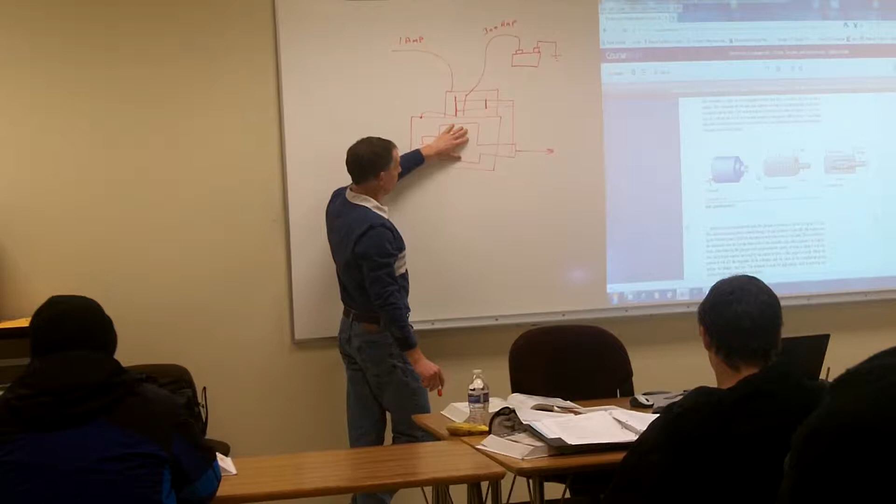So when I turn on my ignition, this thing might only take about 1 amp of current to engage that solenoid. Once that solenoid engages my starter, then I'm drawing close to 300 amps off my battery. It takes anywhere from 150 to 300 amps depending on the vehicle—that's about how much current it takes to start spinning that motor and turning your engine over.

Well, my ignition key can't handle 300 amps of current going through it. If I were to put my starter motor directly into my ignition key and tried turning that starter over directly without a solenoid or relay, I'd be drawing 300 amps through my ignition switch. Most likely I'd end up burning up the contacts in my ignition switch, or it would heat up awfully hot and burn out my switches.

So that's what we use our relays for—to switch very low current into very high current.

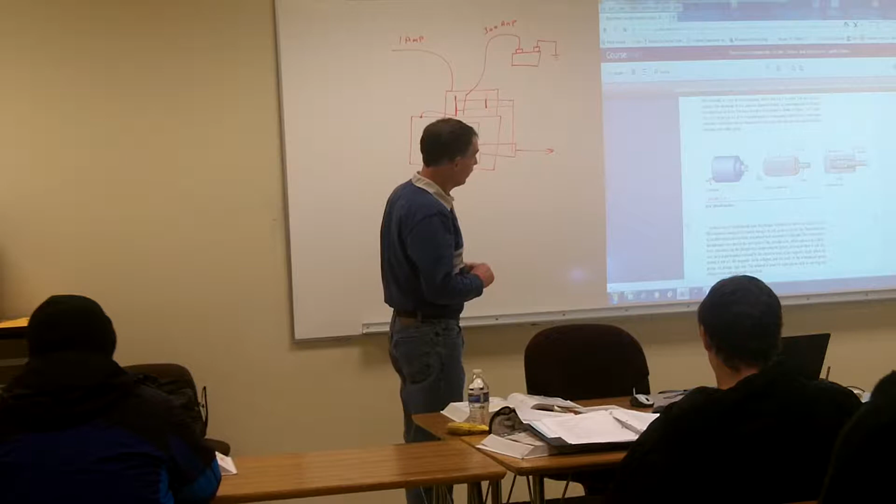And we're going to take a look at the lab here, that's lab 7—we're going to take a bit more of a look at the relay there. So those are a couple of devices we see all the time in our field. A lot of times we might just use this to engage some other type of device in our automation equipment, and relays we can use either to control things or use them as logic.

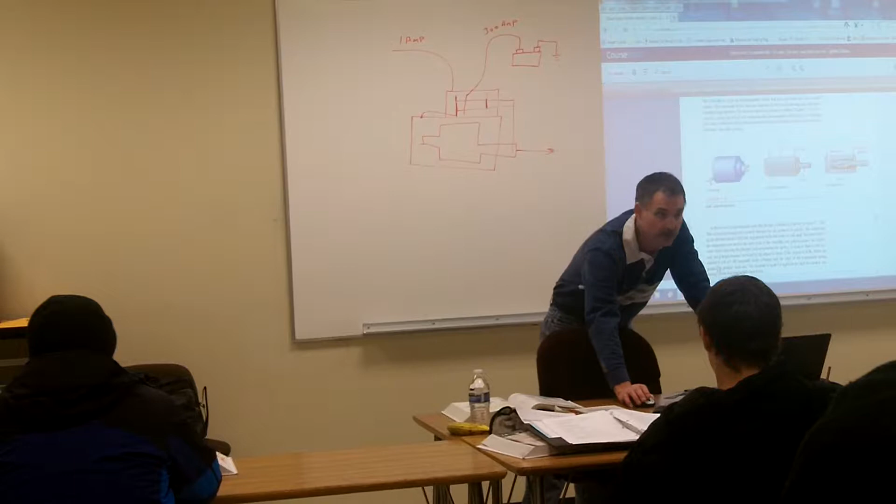So let's—does somebody happen to have their parts kit with them with their relay in there? I don't have that part number for that relay.

So let's take a look at the relay here. You have the number—12 volt DC, double pole. You know what they're looking for, you know what your relay looks like. This thing? Oh, this one here—here's your relay that came supplied with your kit there. So that's the one that if you have your parts kit, you can dig out.

And if you have your lab manual, we're going to take a look right at your lab, because that's a little tricky—there's a little circuit there. So you're going to go through the lab, and when you get to the further investigation, you have to design your own circuit on page 123 of your lab manual.

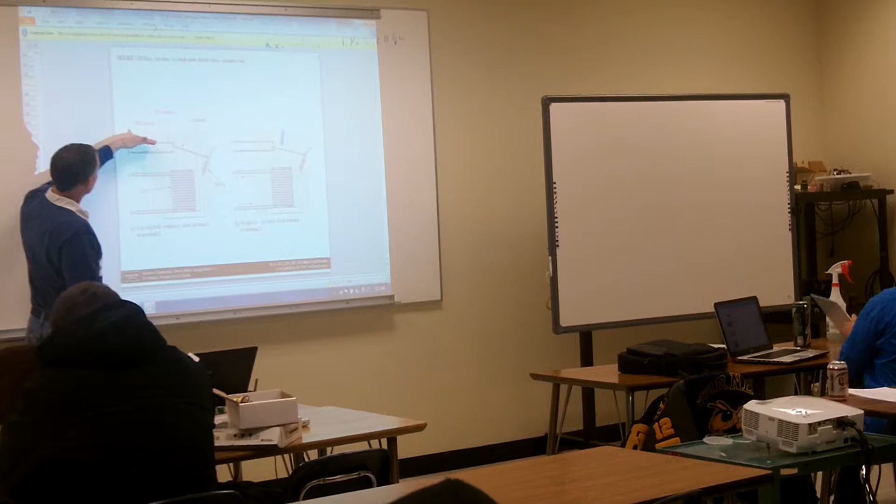So basically, this relay that you're looking at right here consists of a coil and then a switch. It has either a normally closed switch, which is the top one, and then the normally open contact.

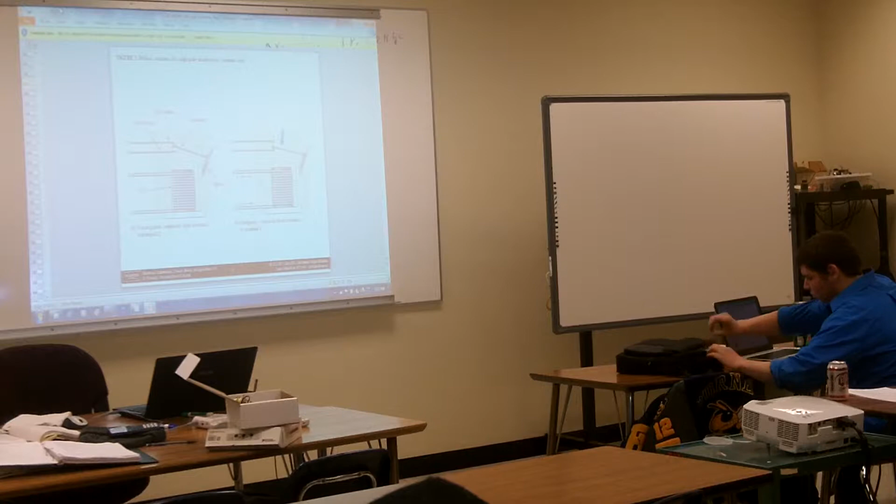Basically what it is, we're going to have our DC power supply. And typically when we're drawing up symbols for our relays in our schematics, we draw it up as just a circle. And a lot of times, from the old days, they're called CR1s, meaning it's represented as a control relay.

And we would number CR1, CR2, and go down the list for however many relays we had. So a lot of our equipment, way back prior to the early 80s, was all done with what's called relay logic—instead of PLCs, programmable logic controllers, or microcontrollers, all these solid-state devices, or even transistors, we used to use mechanical relays.

And then these would come out of our circuit boards or whatever, and then we could control our different devices. So this is the coil, this makes up my coil. And then what we would do is—I'll draw it a bit simpler—we might have another source, and we'll just say we're turning on a light bulb.

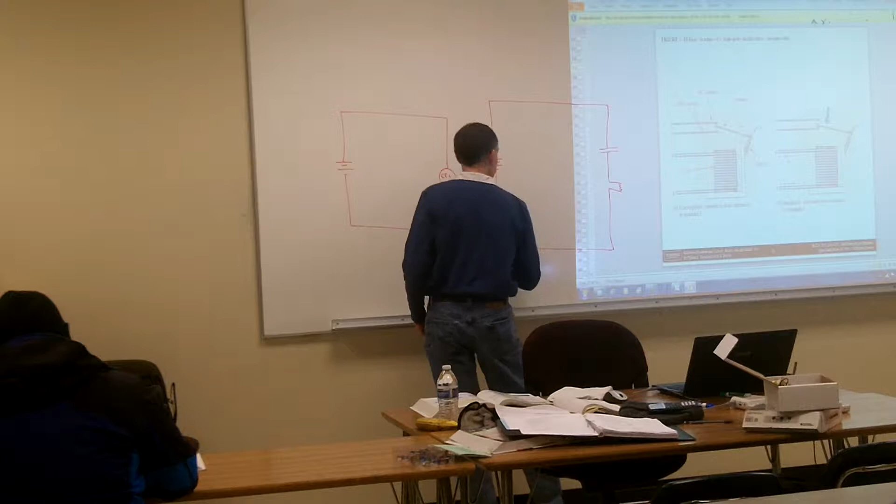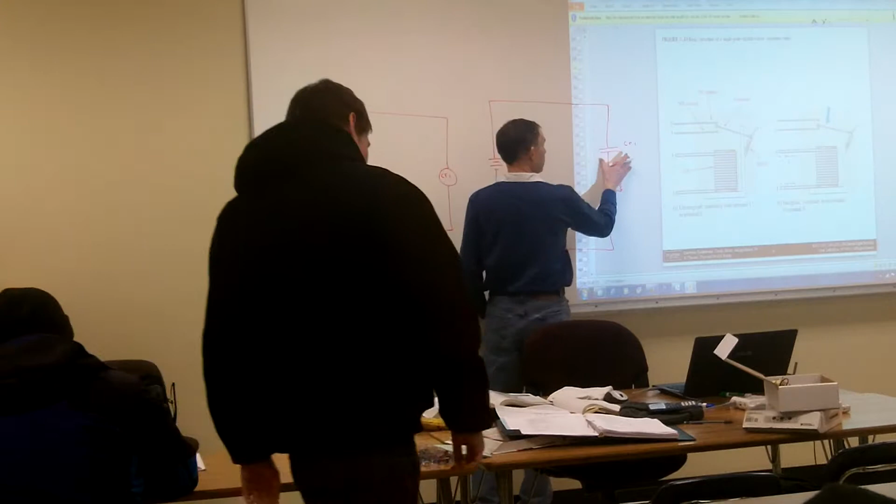And then we could call that one CR1. So we'd also name that contact CR1. So what it did is it tied this coil to this contact. This one's CR1, but this is a normally open contact.

So right now, if I don't apply power, let's put a switch here. If I have my switch open, I'm not energizing my coil. If I'm not energizing my coil, my contacts stay normally open.

And we'll say this is 5 volts DC, and we could say that this is 120 volts AC.

So then what happens is here I got this control relay, being controlled by 5 volts DC. I go ahead and close my switch. I energize that coil, and it's going to pull this contact. It's going to form a magnetic field there, and it's going to pull this armature down.

It's going to try doing like a magnet, pulling this armature down, and then it's going to make contact with my normally open contact. And then this contact is going to close. So then also now I got a current path going through there.

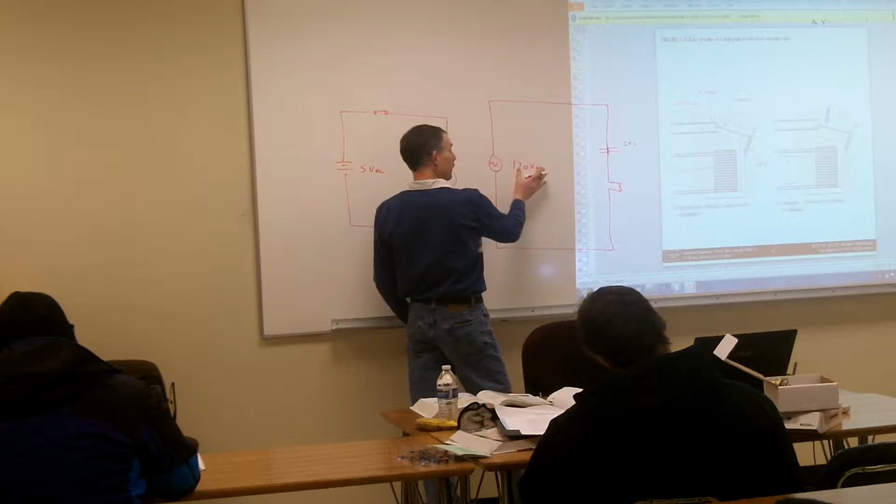Now I have 120 volts AC going through there, and now I'm connecting my path, and now all of a sudden my light starts to light up.

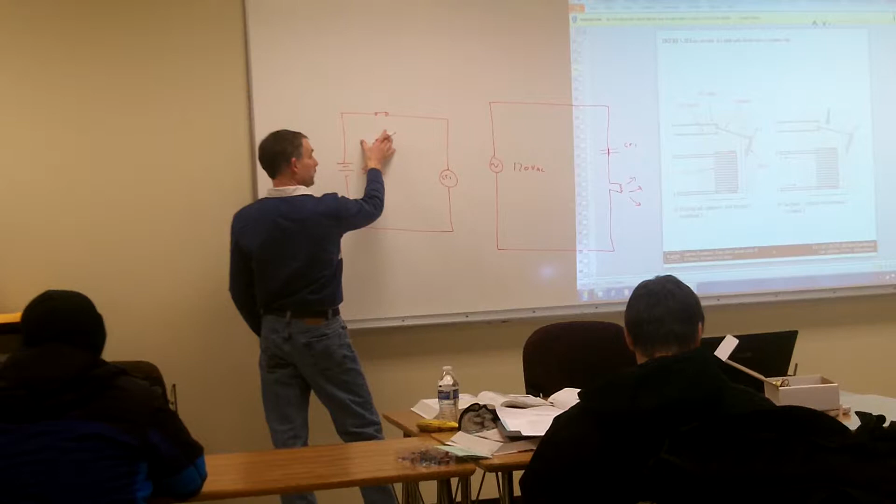This here, depending on the resistance of the windings, might only draw anywhere from, might draw only about 20 milliamps of current. Here I could have a really big, heavy-duty light bulb or something, and now maybe I'm drawing 2.5 amps.

So I can take my switch. I can have just a very small signal switch that doesn't have to handle very much current, just a really lightweight switch.

I close that, it energizes my coil at about 20 milliamps of current, and then it's going to close this contact, mechanically close that contact. My current's going to start to flow, and now I'm drawing 2.5 amps of current going into my main controlled circuit.

So I can take very small signals coming either out of a lightweight switch, or it might be coming out of a printed circuit board that can't handle much current, and switch very large amounts of current.

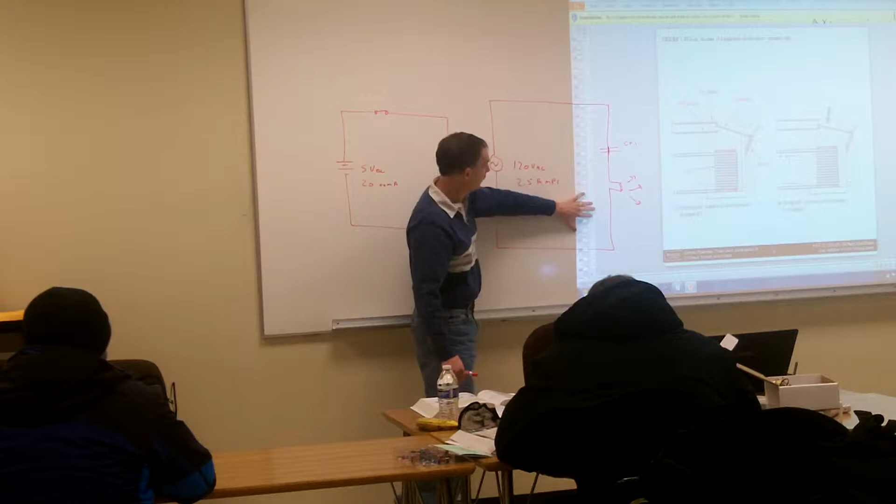Some of these ovens and stuff, they've got hundreds of heating elements in there, and we could be drawing anywhere up to 500 amps on these big industrial ovens. And I could control a 500 amp oven with just 20 milliamps of current.

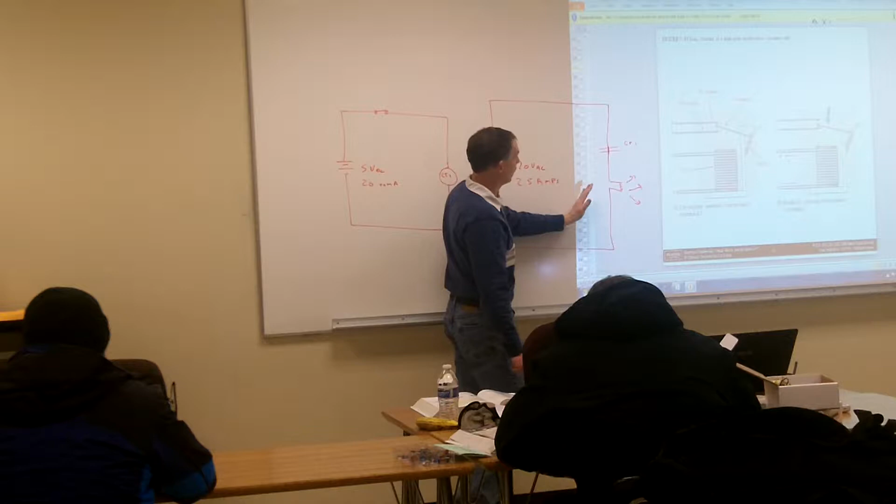But on the secondaries, the size of where my contacts are, that can draw as much current as I need to, as long as I size my coil the right way, or size my relay the correct amount. So it's just one way for us to be able to take a small signal and control very large amounts of current.

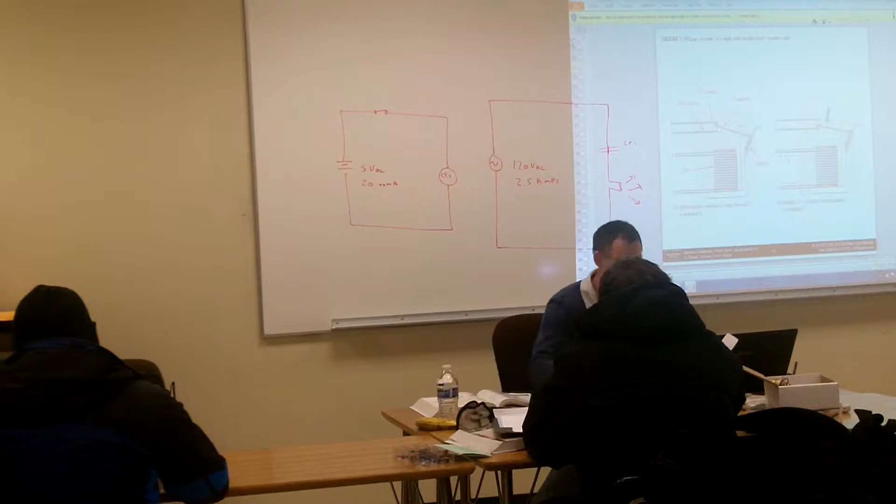All right, so let's take a look. Let's open up and take a look at the lab here, and then I'll show you how I had approached this problem.

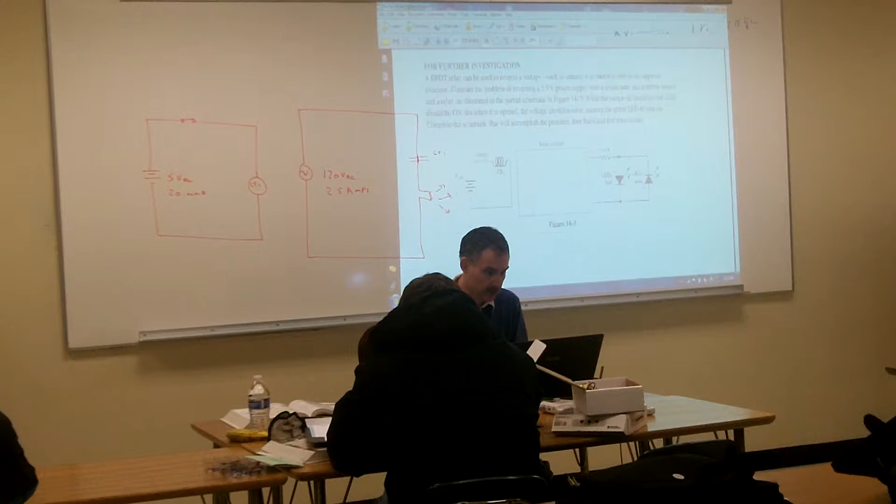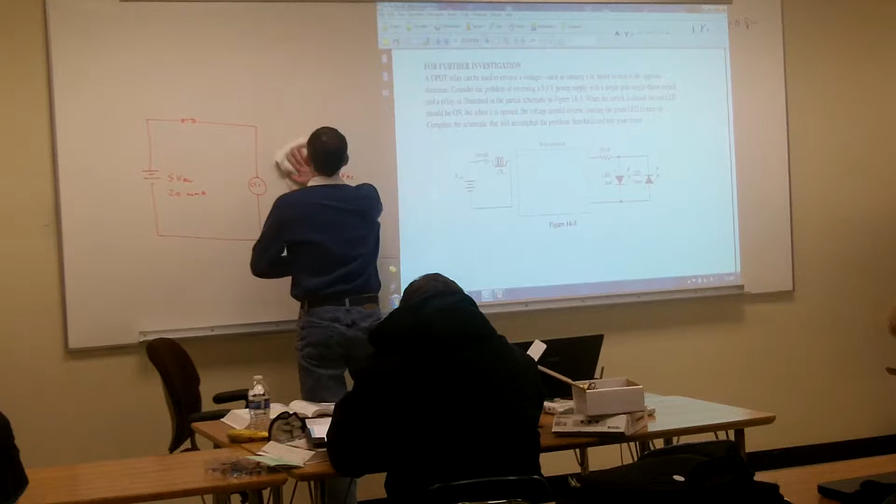So here's our further investigation in our lab manual. So what they want you to do is, I got two LEDs.

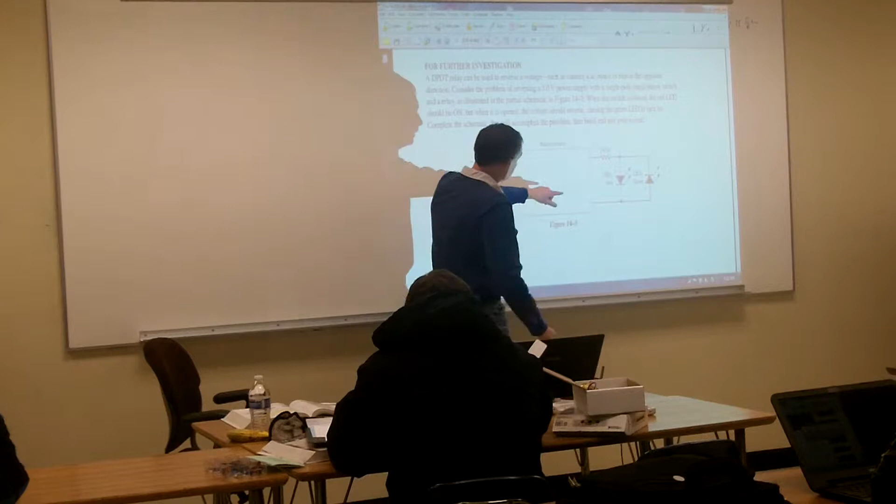These LEDs are solid state devices, and they only allow current to flow in one direction. For example, on the red LED, this side has to be more positive than this side. This side has to be more negative. This is called my anode, and this is called my cathode.

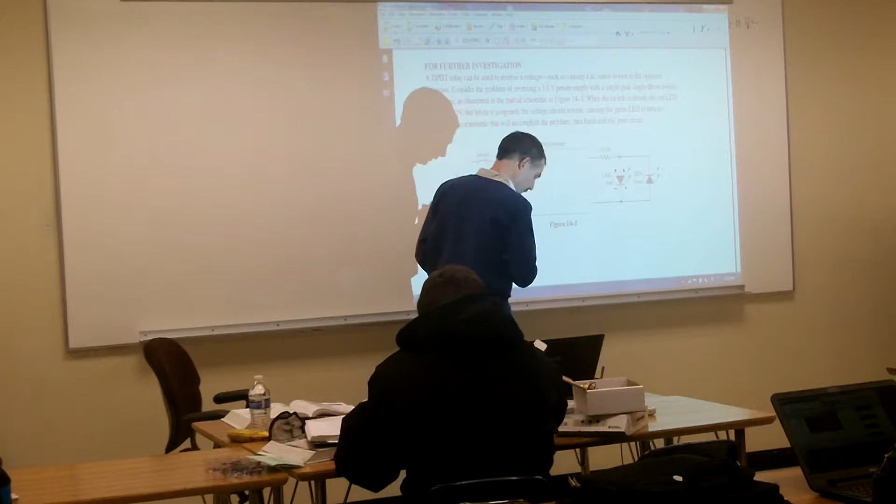So this is what we're going to get into when we get back from break. We're going to be looking at these solid state devices.

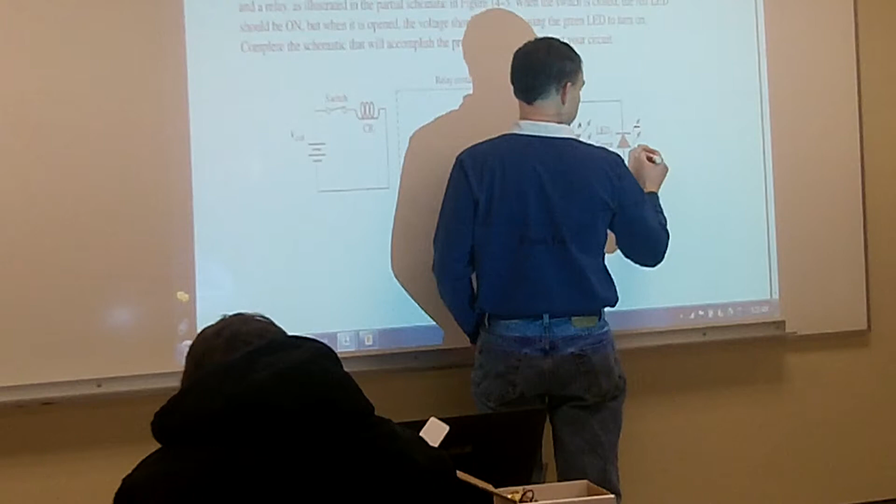On the other LED, this one wants to be more negative, and the anode needs to be more positive than the cathode. So they're only going to light up in one direction.

So I have a series parallel circuit is what I have. I have this 330 ohm resistor, and then I got two LEDs that are in parallel.

So if I were to straight line that up—sometimes, like I said, sometimes it's just easier to straight line your circuits.

So here's my 330 ohm resistor. And what they want us to do is, on my coil of my relay, when I'm at rest, when it's not sitting, let's see which one do they want lit up.

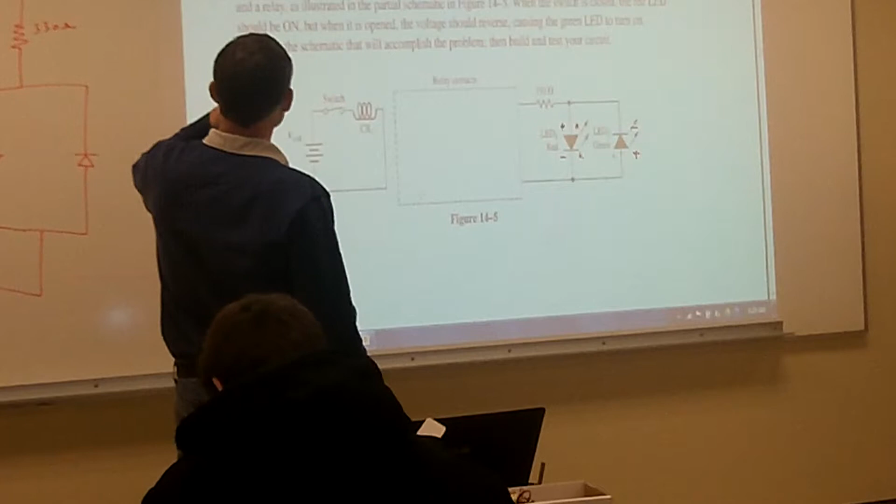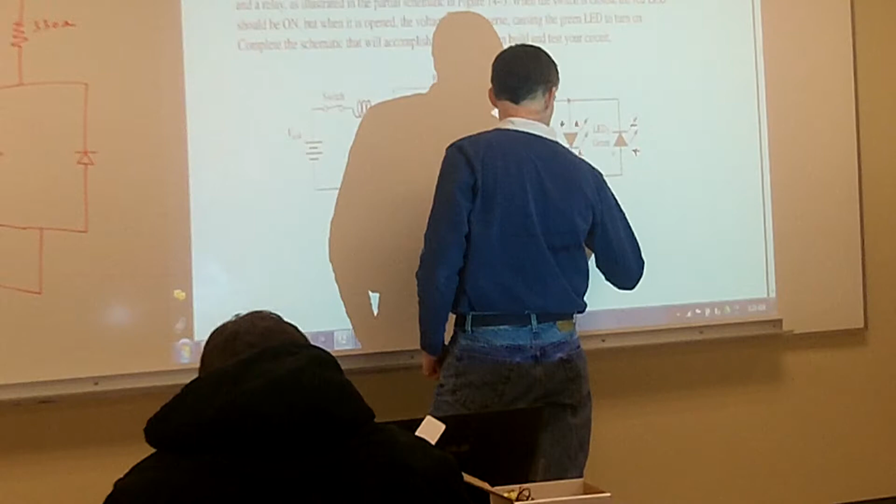When the switch is closed, the red LED. So this one's going to be with my switch closed. So this is going to be with my coil energized. Sometimes we just kind of make little notes on our schematic so we know what's going on.

And when it's open, the voltage should reverse, causing the green LED to turn on. So then this one is coil not energized.

So what I would do is I would first take a look at what it is that I need to do. Since I know that the polarity of my LEDs are going to determine which LED is going to be turning on, then I know what I want to do is switch the polarities of these legs here.

If I make this line here more positive and this one more negative, and we'll say this one's my red LED, this is my green LED. If I have this one more positive and this one more negative, which LED is going to turn on? Red.

So, isn't it the red, which one? The red. The red one.

Because if I do my current paths and polarities, I know this is going to be, even if I don't know the voltage, I know that my current flow is going to go this way, right? And it's going to come up, and it's going to try to split. Some of it's going to try going that way, and some of it's going to go this way.

Especially if I wire them up in series. Divide the voltage. Those are about the two main things that we use resistors for. We either use them for current limiting or we divide the voltage.

So this current limiting resistor is to limit the amount of current that we've got going through our LEDs. Typically our LEDs like about, for a standard LED, we can run anywhere from 20 to 40 milliamps on them. So we'll just say, so we don't heat them up, we'll say 20 milliamps.

Say that we want 20 milliamps of current. Remember now, this LED is not even in the circuit because that's acting like an open, so we'll just go ahead and get rid of it. So now we just have ourselves a series circuit.

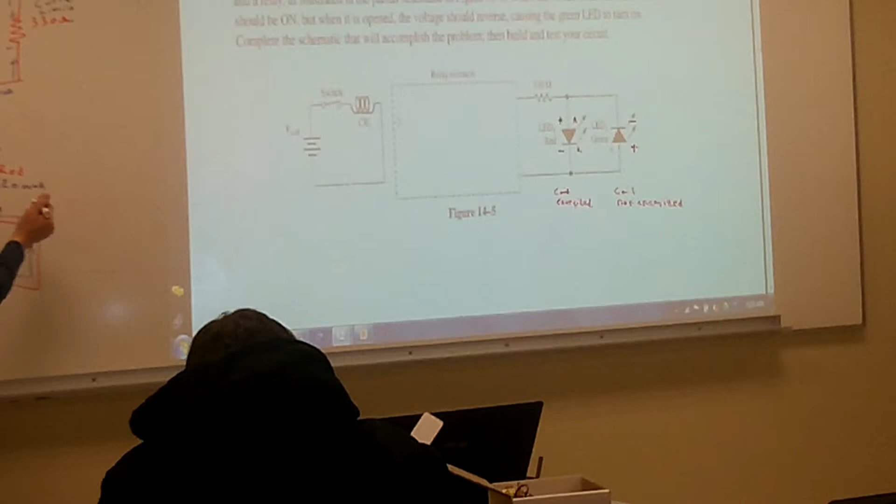We know that LEDs also have a voltage rating. So we'll just say that it wants to take 2 volts to light up the LED. It's going to want to take about 2 volts. Did they say what?

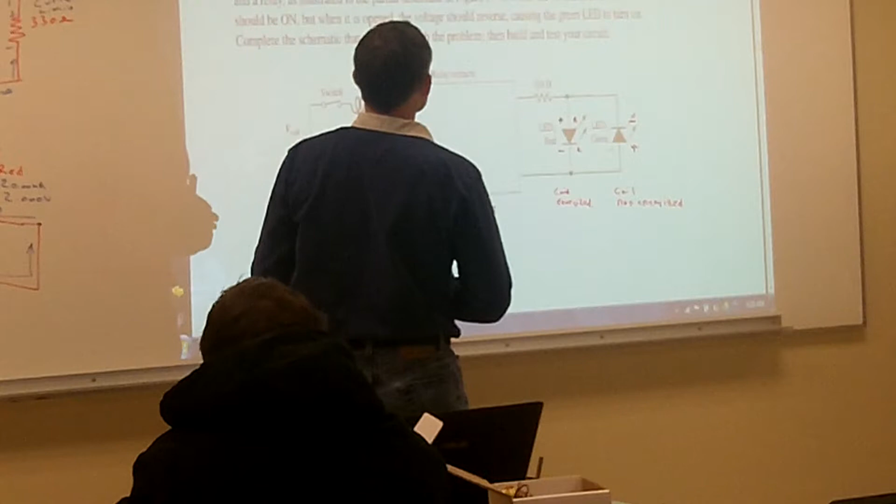Yeah, so they're just going to use our 5 volts. Is that what our relays are? 5 or 12? 5 volts. They are 5 volts? Okay.

So we know that I'm going to have a source voltage. My voltage drop across here then is going to be 5 volts. That's what we're going to be using for our source voltage. We know the LED is going to want to take its voltage first, and it's always going to take 2 volts of that 5 volts. The remainder is going to drop across the resistor, and that's going to drop our 3 volts.

So then I'm going to find the current, since they already gave us our resistance value. So now if I take my 3 volts and divide it by my 330 ohm resistor, how much current do I have going through that resistor?

9.09 milliamps? Yep, 9.091 milliamps.

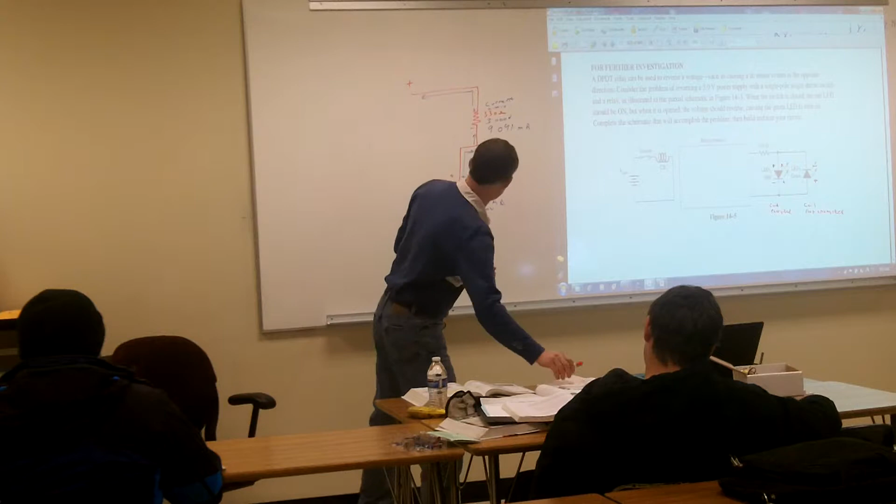we're going to go back and we're going to put our other LED back in. The one with the line has to be more negative than this one, and this one's going to be our green.

So now I know when I'm positive and negative in this polarity, the red one's going to turn on. Then what I want to do is turn the green one on. So then what I have to do is come up with a way of switching the polarities. So this time I'm going to switch it to negative positive.

This time now my current's going to flow this way through my resistor, and it's going to come down, and come by, and this one here now is going to become more negative on my anode side and more positive on my cathode side. This current here is going to go through, and this one's going to be negative, positive, and then back to here. So now I'm more negative on my anode, and then the LED is going to do what?

Act like an open. Perfect, that's exactly what we have to have. So that one's going to act like an open, and the green one is going to act like a what? A short, like a switch. That one's going to short out and turn on, and then it's going to allow the current to go through the green one this time, and nothing going through the red one. So the red one turns off, and the green one turns on, and then my current just comes back and goes to the positive side of my source.

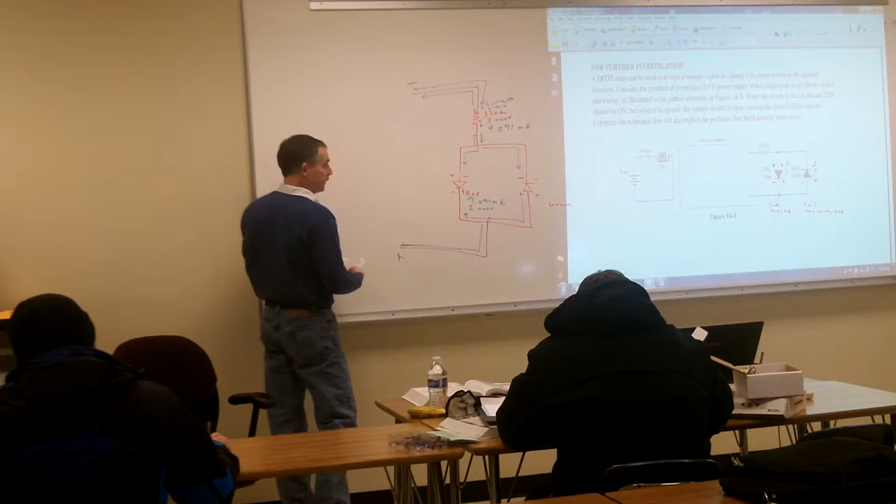And this is a little tricky until you really start getting into using some programming and stuff. But whether it's relay logic or programmable logic or using LabVIEW, the concept is all the same. We're turning on and off different things.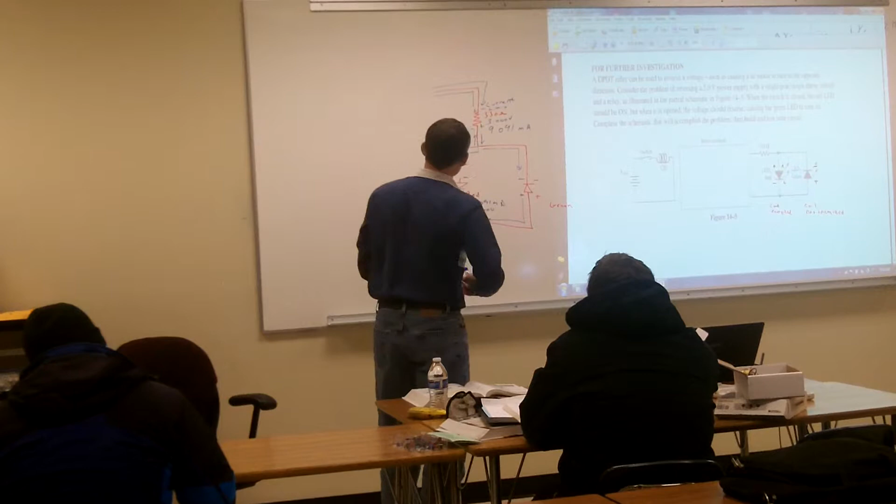So what we're going to do is we're going to take a look, and there's no real easy way of having you try to solve for it. This is actually a lot tougher problem than what it appears to be.

So we know that one time here we're going to do our positive, negative, and then when we energize the coil, then it's going to switch polarity, and then it's going to go negative, positive. Here I have these are my two common things to the circuit. I have two wires that are coming out, and those are my commons.

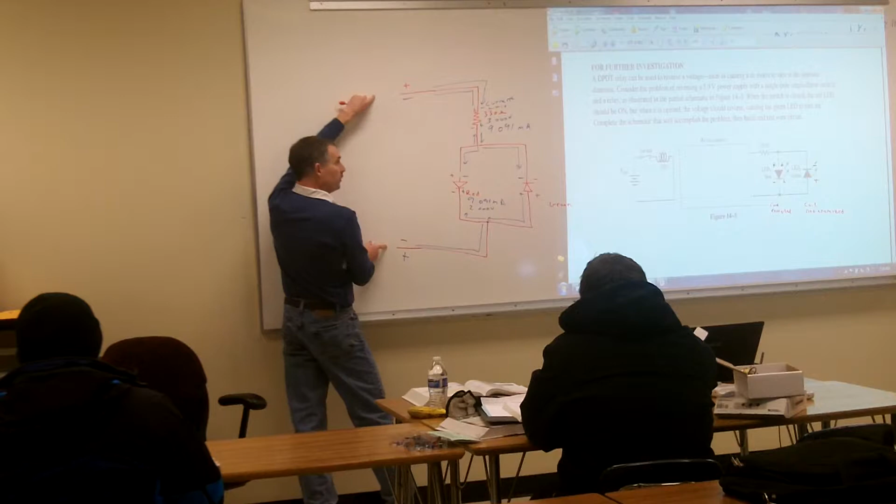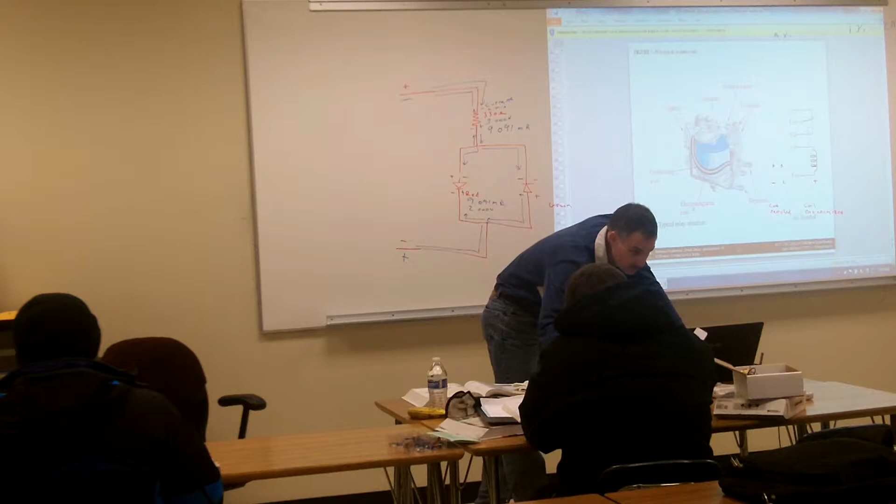So what we're going to take a look at is here's our contact configuration. And when I'm looking at these contacts, we're going to pop up the data sheet from our coil, from our relay.

I have my number 2 pin. That one's going to be my normally closed contact. My number 3 is going to be considered my normally open contact. And this pin 1 is what we normally call our common. That's what you'll see on your data sheets typically. This one here is common to both pins 2 and 3.

2 and 3 have no correlation with each other. They're totally separate. But pin 1 does have a correlation with pin 2. And if I energize it, then it has correlation with pin 3. So that's our common—it's common between both pins 2 and 3. But 3 has no correlation with pin 2. Those two, I would never wire up anything just to pins 2 and 3 because they would always act like an open.

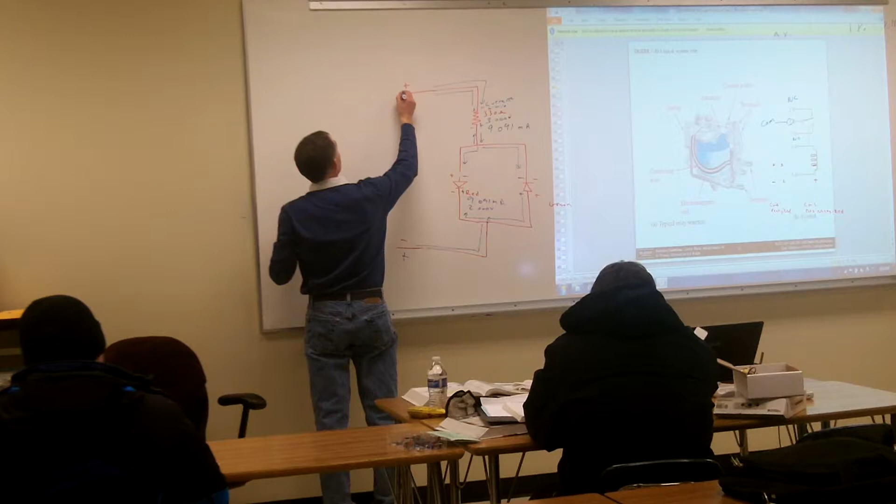So I know that here's my 2 lines that are coming in. What I'm going to do is attach these ones to my common side of my contact. So here's my contact, and that's going to be going to my relay contact. So the blue is my relay now. And then the common has that armature on there, and then it's going to make contact. When it's not energized, it's going to make contact with this one.

So according to this schematic, we're going to—you want the relay pin numbers? Not yet, we're going to pull up the data sheet. So we're just going to use what's on the board here right now. The pin numbers that we're using now are just related to this one here. What Bob's talking about is the actual relay pin numbers—we're going to take a look at that later. So our pin numbers are going to change slightly when we go into a real relay.

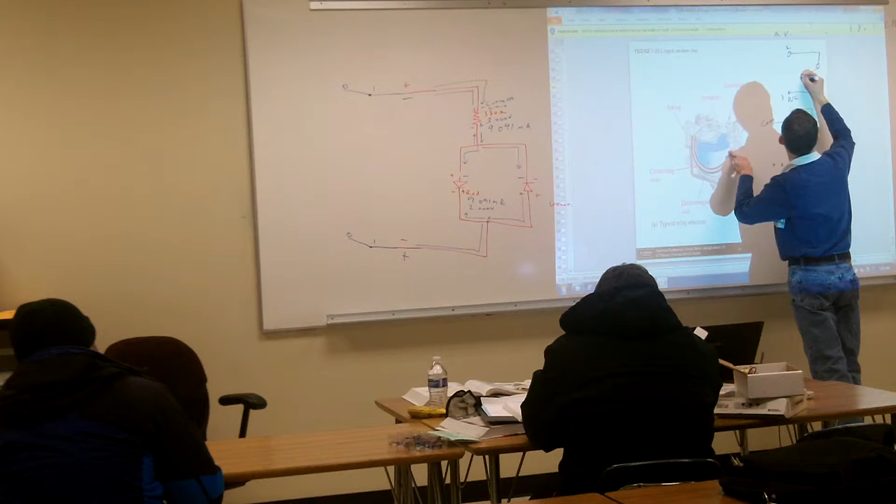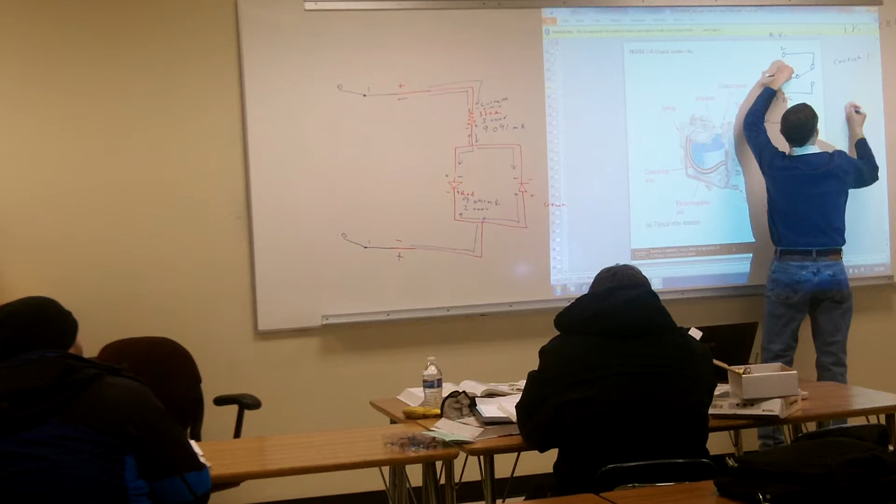So this one here is going to be our pin 1, and this one's going to be pin 1. So what they have is, because we're using a double pole double throw, we actually have 2 sets of contacts—pin 2, pin 3, and pin 1. So these are both electrically separated. This is going to be my contact number 1. This is going to be my contact number 2.

When I energize the coil, it's going to energize this one and this one both at the same time. I've got 2 separate contacts. So that's what we're using, a double pole double throw—that's what we have in our parts kit. And these are both mechanically tied together. A lot of times you'll see it with a little dotted line on there, representing that these 2 are mechanically tied together. So if one switches, so does the other one.

So this one here is going to be our pin 1, that's our common, and then we have our pin 2, which is our normally closed. We just abbreviate it as NC, normally closed. So there's our pin number 2, NC, normally closed.

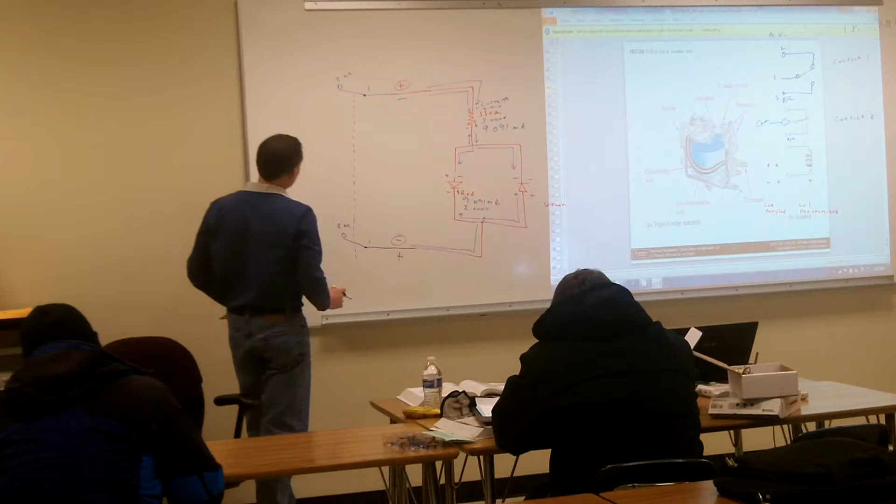Now what we need to do is we need to make, so we're going to look at the red one here first. We need to make this one more positive and this one more negative. And I'm going to kind of do it—how do I want to do it? Let's try doing it the way we see it in the schematic.

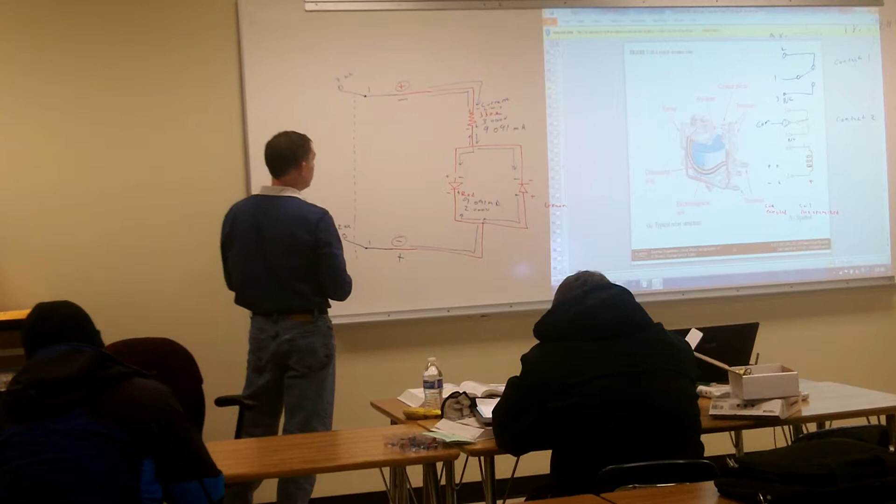In our schematic, I'm going to try making it simple here. We might just see a little source. Then it's just going to say that here's my battery source, my negative is my common—that's going to be my reference point, that's going to be my ground. And then my positive side of my battery source is going to be my plus 5 volts. And another way that we look at it in our schematics is what they just do, is they just do this.

They just make a little T symbol and say plus 5 volts. When they do that, we always know that my reference point, my negative side, is going to be my reference point. That's going to go to my ground.

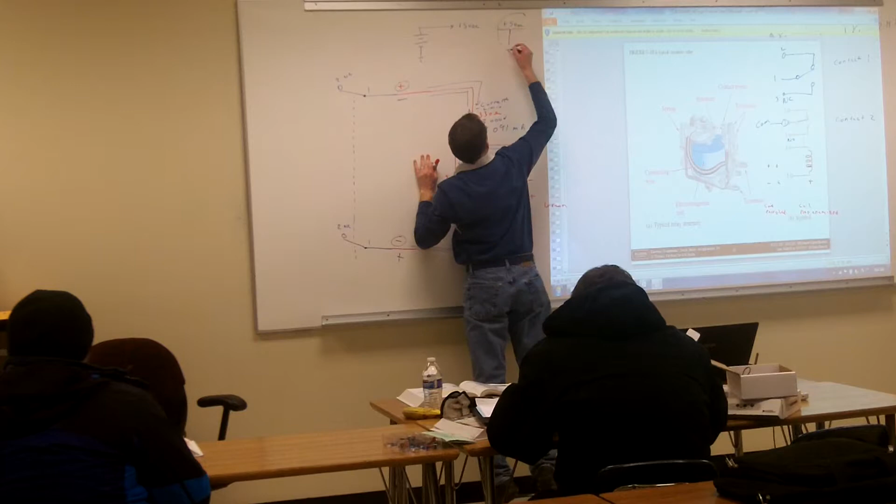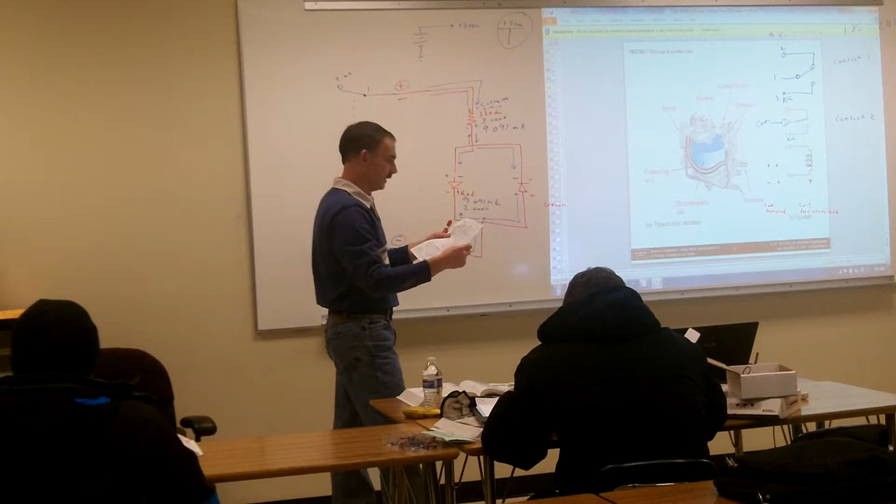So a lot of times we'll just see the symbol that looks just like this on our schematics. Did they hand out your schematics yet? Yeah, so on there you can kind of see that, I'll pull it up here real quick so you can take a look at it and start getting familiar with the schematics.

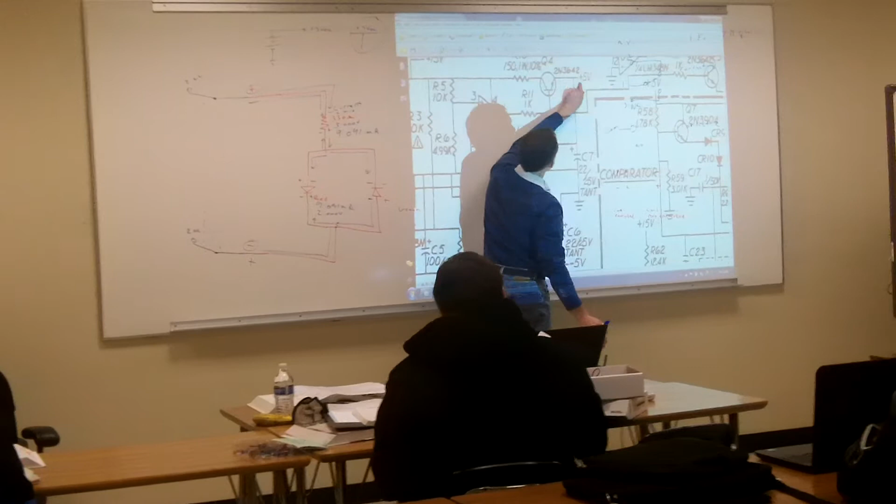So you can see right here, this first part of that circuit, this is my power supply. You can see here they're just saying here's my plus 5 volts, and here's my negative 5 volts. And then my ground is going to be right in between the two.

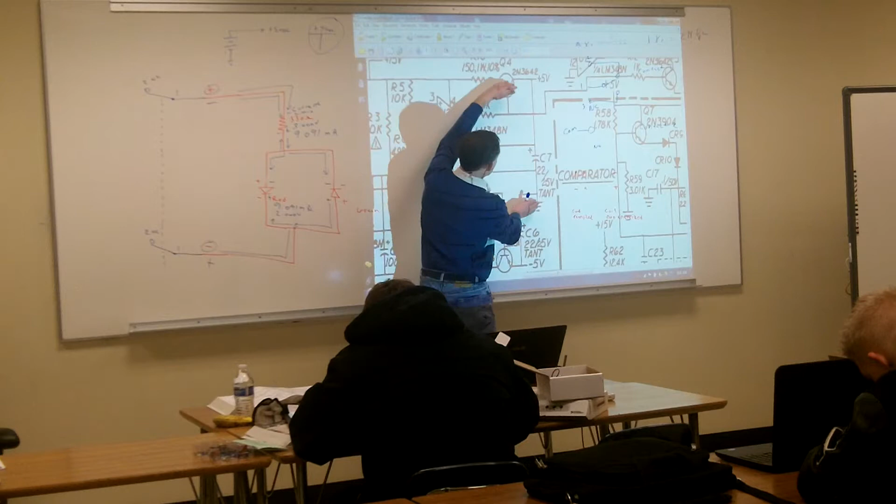Okay, so right now we're just looking at a single-ended power supply. It only has one voltage and one ground. It doesn't have a negative and a positive 5 volts, it's just going to have a positive 5 volts and a ground. And then throughout a lot of the schematic, let's see if I can find one here.

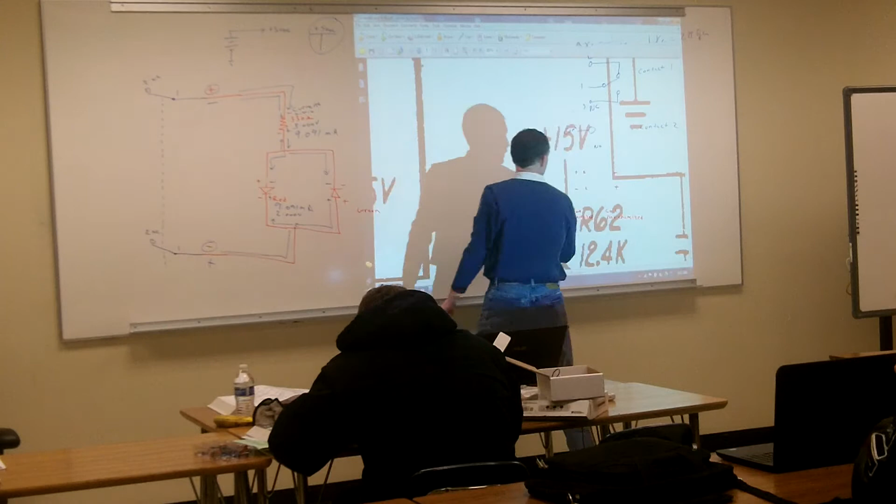Yeah, here we go. So this one has multiple voltages, but you can see that they're not drawing in the power supply every time. They just go ahead and say this is going to be plus 15 volts, and it's going to R62. It's being represented this way. In our heads, we know it's logically wired up this way, but they're just showing you that this is going to be at plus 15 volts.

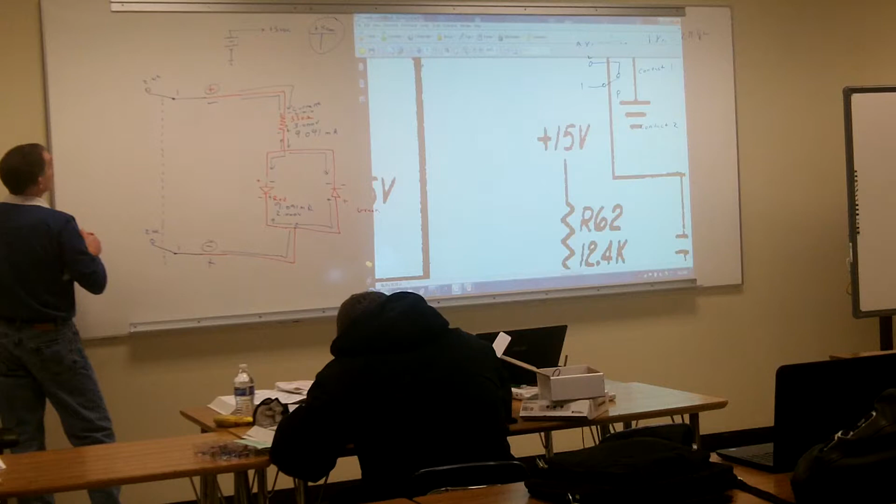So there I know that this one here has to be more positive. So this is going to be my plus 5 volts DC. And then this one here is going to have to be what? Ground, my ground. And so this one here is going to go to my ground.

So then if I'm not energizing the coil, pins 1 and 2 are making contact. That's acting like my switch.

So I know that here's what it looks like. I can go ahead and draw the same thing in. This is what it would look like if I actually drew in the whole power supply, that's what it would look like. And then here's my 5 volt source. But we don't draw that, we don't draw in our power sources every time.

So then what happens is my current is going to come onto my negative side. It's going to go through my contact with my relay, come up, go through. We know it has to be more negative on this side, so then my red LED is going to turn on. This one's going to turn on, the green one's going to stay off. It's going to come up, go up to my current limiting resistor, back through pin 1, up to my normally closed, and then back up to my source. So now I just turned on my red LED.

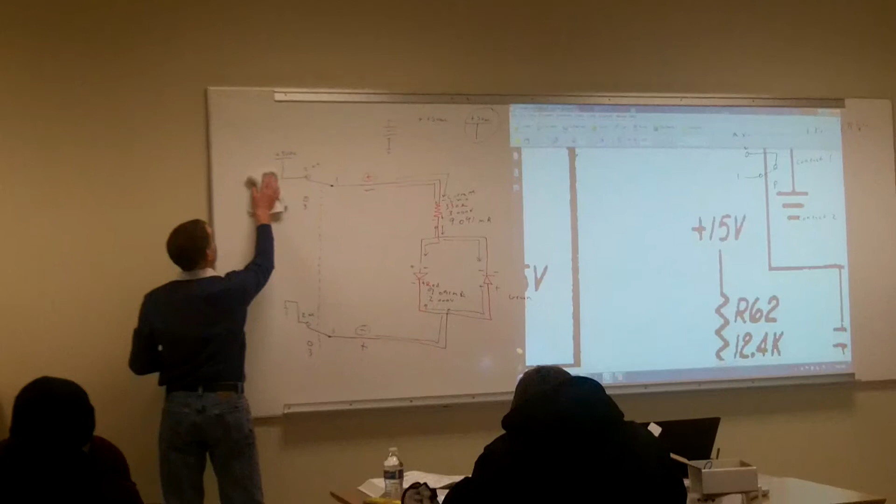Okay, so now I'll show you why we don't draw in all our power supplies every time. So we got the first condition made, what they wanted. I think they actually had it energized to begin with, but that's fine. So we got one condition made: when it's not energized, the red LED turns on.

Now what we want to do is do it the other way, switching our polarities. Before, this one was hooked up to our plus 5 volts. Now what we want to do is make this one more negative and this one more positive. So what we're going to do is tie pin number 3 to what? Ground, the ground.

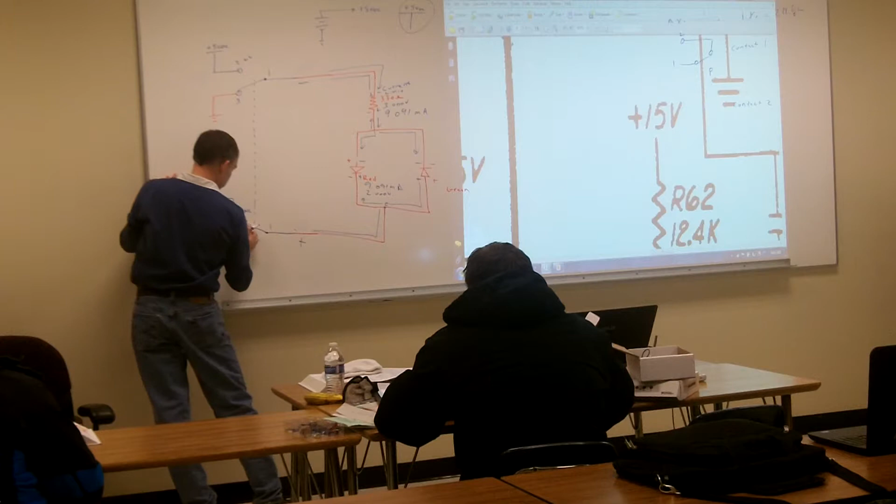And now what happens is this is my ground, my more negative side. This is more negative, so now my current is going to start to flow in the opposite direction.

Now my current flows this way, down through negative, positive, down through this relay, negative, positive, back down and into my ground. So all we're doing is taking those two contacts and switching the polarities. When it's not energized, my normally closed contacts make this one more positive, this one more negative, turning on the red LED. I energize the coil, I switch the polarities of my battery, just like flipping it around in my circuit. Now this one becomes more positive and this one becomes more negative, and it turns on my green LED.

So now I just showed you how to wire up that whole further investigation, but I'll tell you the challenge will still be just wiring that thing up.

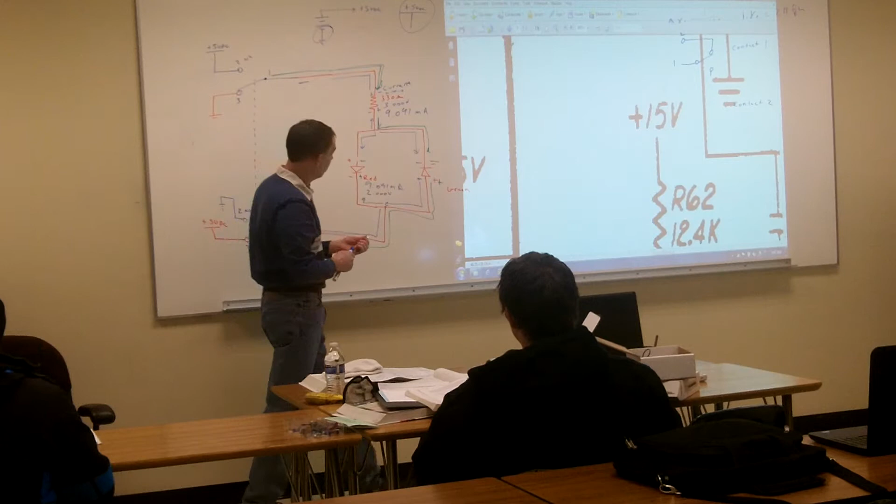Absolutely, yeah, it's tough. Does that make sense with what's on the board? It's a solid picture. I wish I got that picture when I was learning. Yeah, it's hard to get that picture. So you guys that do it earlier, you got to work at it a little more, but that's why I had to help, why I had to get you going, because understanding how to hook those up would have been nearly impossible unless you'd been in the industry. That's not an easy task to do. But it's good to challenge yourselves, just to see if you can come up with something. But that's a tough circuit. It seemed very simple and straightforward, but man, trying to get that picture in your head, that's tough.

All right, so let's keep this schematic up, and then we'll fill in our diagram.

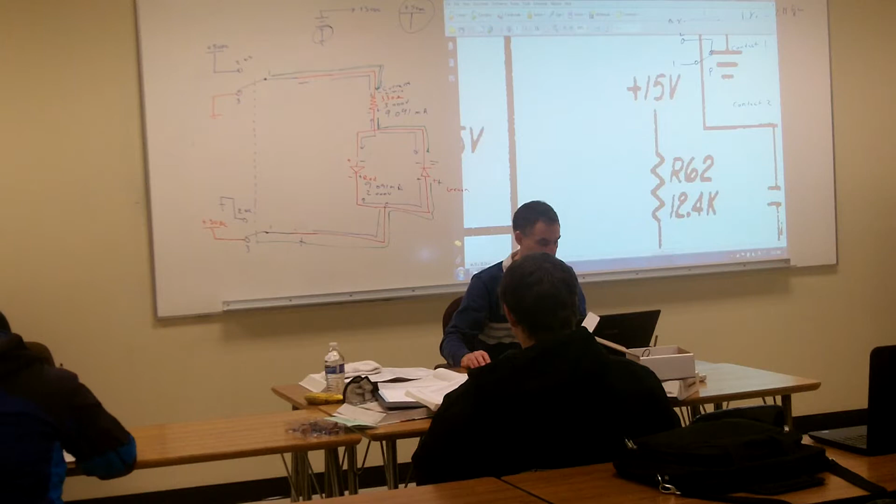And then even knowing how to draw the thing up, that's tough too, just knowing how to draw it up. This saves you a lot of time.

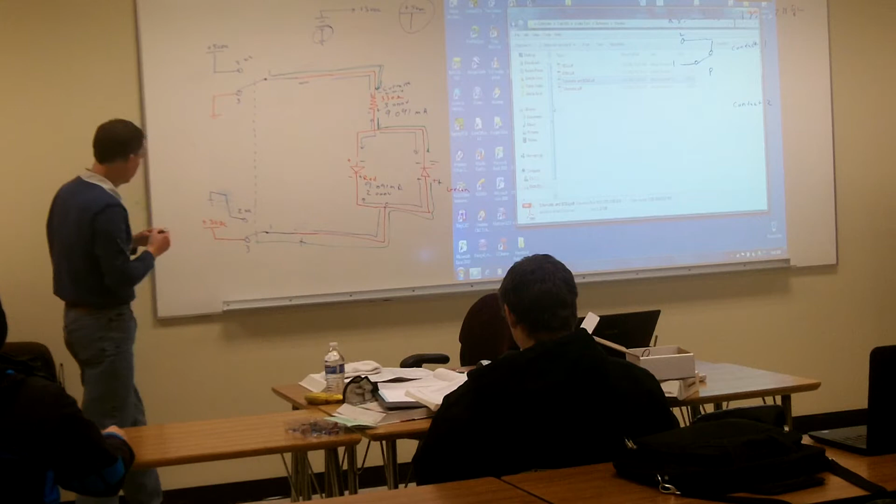One thing you can see too is that when you're drawing your symbols, typically we always draw them vertically. All our symbols are always vertical. So my plus 5 volts always comes up and sits up this way. My ground, I come up and come back down. I don't ever want to draw it upside down, because that makes for a very chaotic layout. You never want to draw your symbols upside down. So you always draw them right side up, even if you have to come over and drop back down, so that all your symbols are facing the same direction.

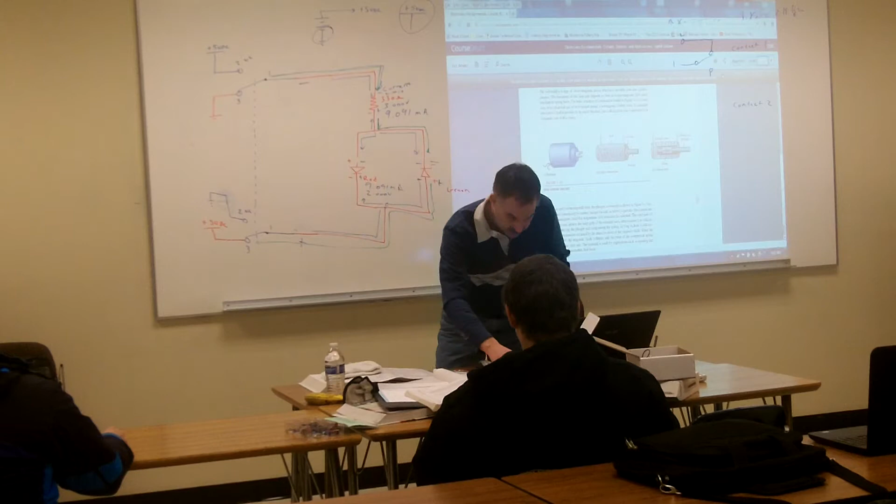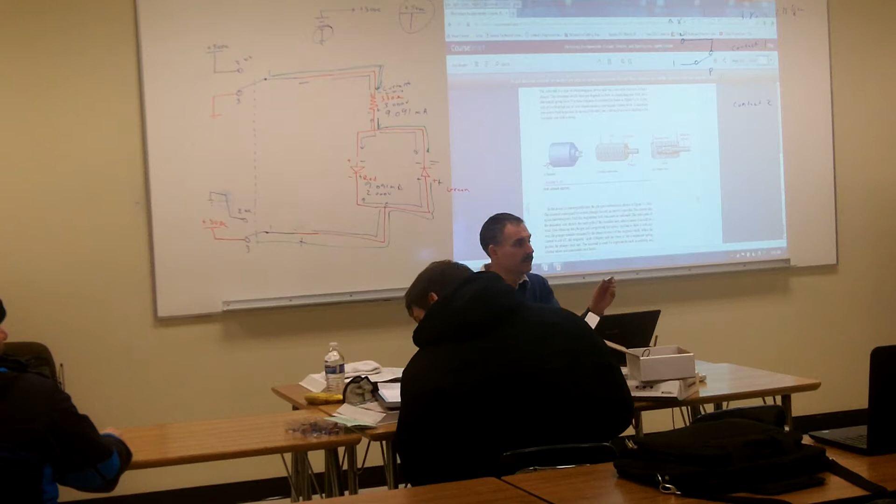Alright, so let's take a look. I didn't have the part number, so I haven't been able to look it up. Did you find this on DigiKey or just a random Google search? Are we talking about the schematic? Yeah, for the relay. I found it in DigiKey. You did find it in DigiKey? Okay, yeah, so let's use that.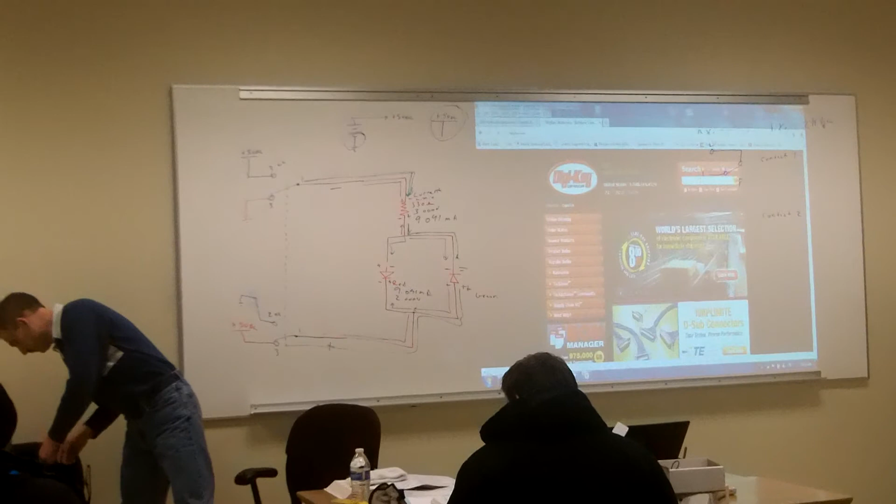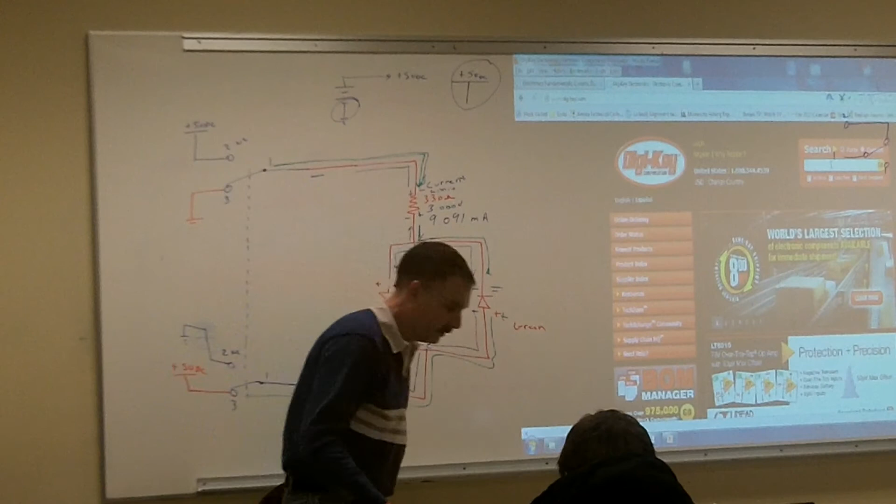I can read it here, but yeah, you can go do it that way too. So I'm going to have to write this down. You got good eyes? I don't know what that part number was. I think it's like RP... RPA, sorry, that's right.

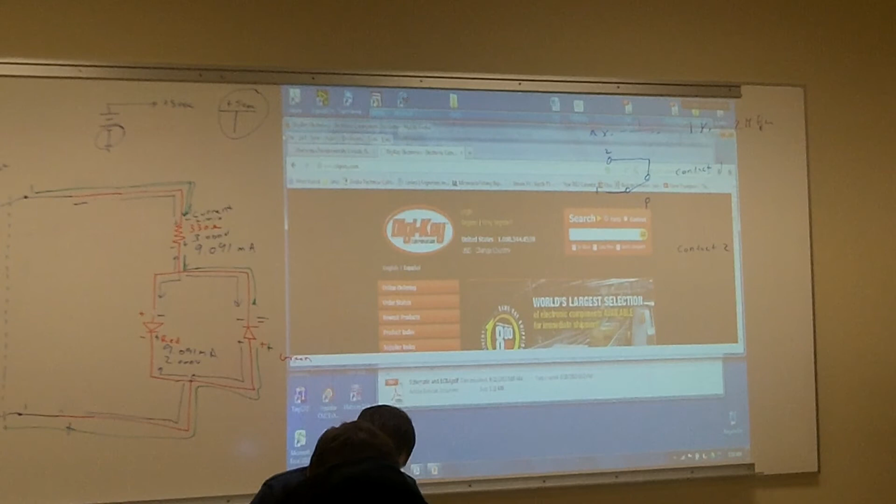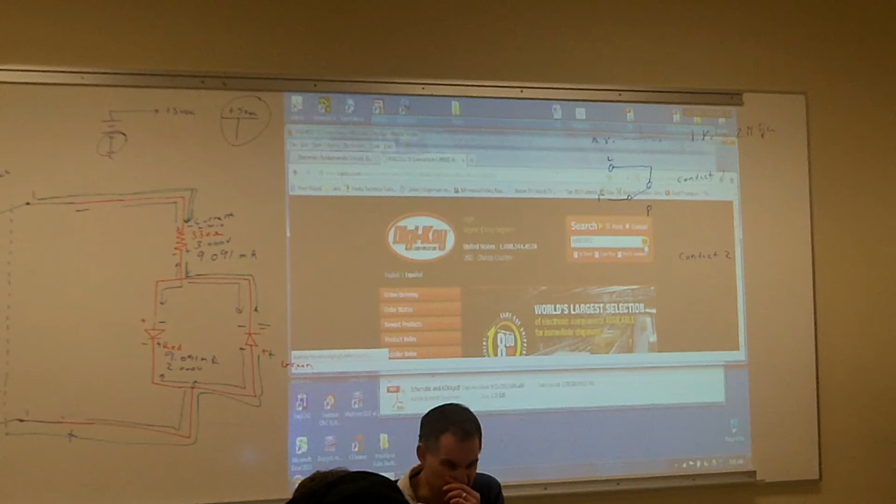So we'll try doing that first. I know it's made by them, so the first thing I'm going to do is narrow my search as much as possible. I'm just going to put in the part number and see if it comes up with anything: RP82101. See if by any chance it finds it. Now look at that, there it is, came right up. So all I had to do was put in the vendor's part number, and it automatically came up with my relay there. It's in our parts kit.

So now, especially next semester, we're going to start using our data sheets a lot for all our components. We haven't had to do that with our resistors and stuff, but if you've already had digital, you already know how to do data sheets. If you haven't had digital yet, you'll be introduced to data sheets now.

So we're going to open this up. All I'm going to do is go down to where it says data sheets, and open that up. Then I'll open it in my PDF, and it tells us some things about it. It's a 2-pole, 8 amps.

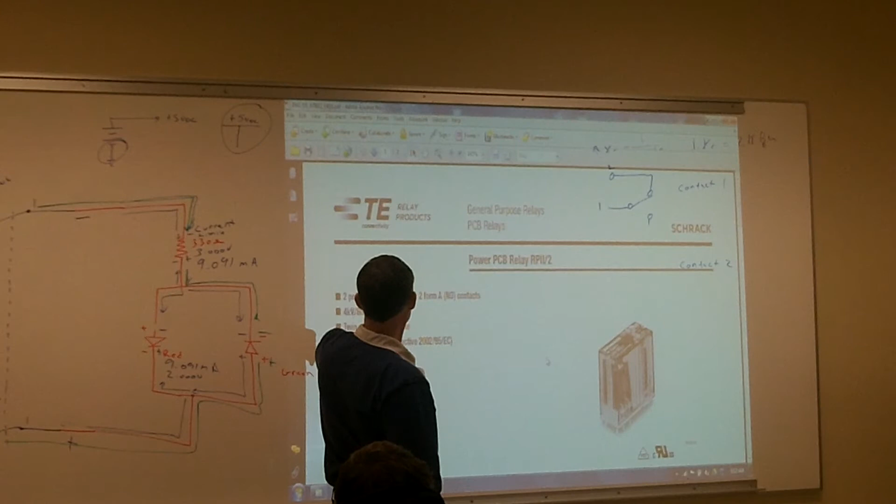Two form C, I don't know what that is. I think that CO represents common, or no, that should be our normally closed. I'm not too sure what the abbreviation CO stands for, but it represents 2 normally closed contacts, and then our 2 forms of normally open contacts.

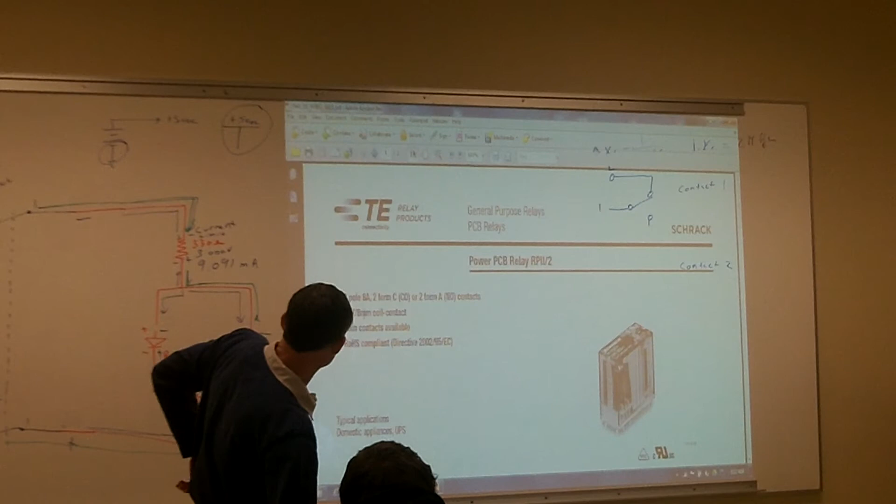This thing can handle, on the contacts itself, 8 amps of current. But that's not how much current it's going to take to energize the coil. We should be able to find that. Coil voltage range... well, here we can kind of figure it out.

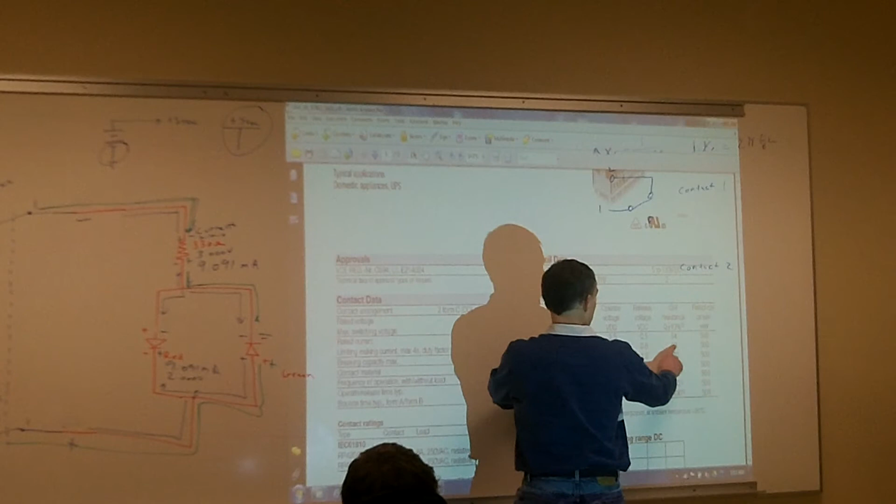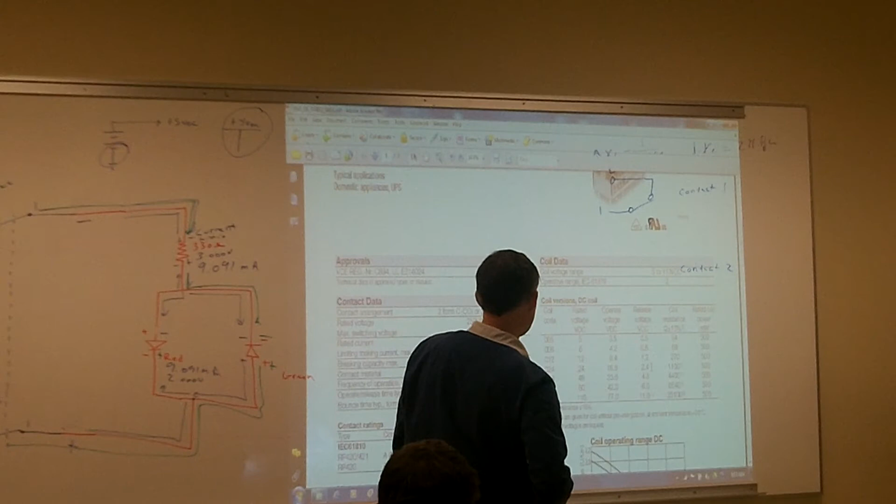That can't be in ohms. What's 500 milliwatts divided by 5? Did you forget? Because if we have P equal to... Kurt, did you forget to have them buy calculators? I don't see a calculator out.

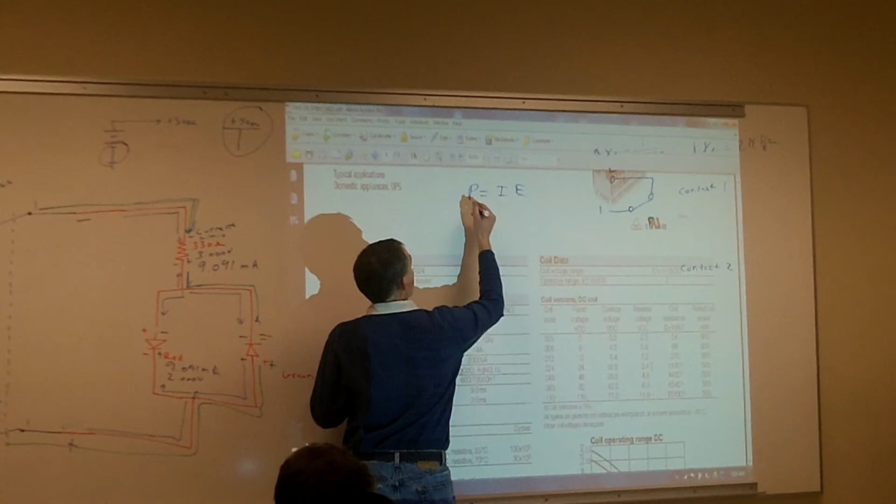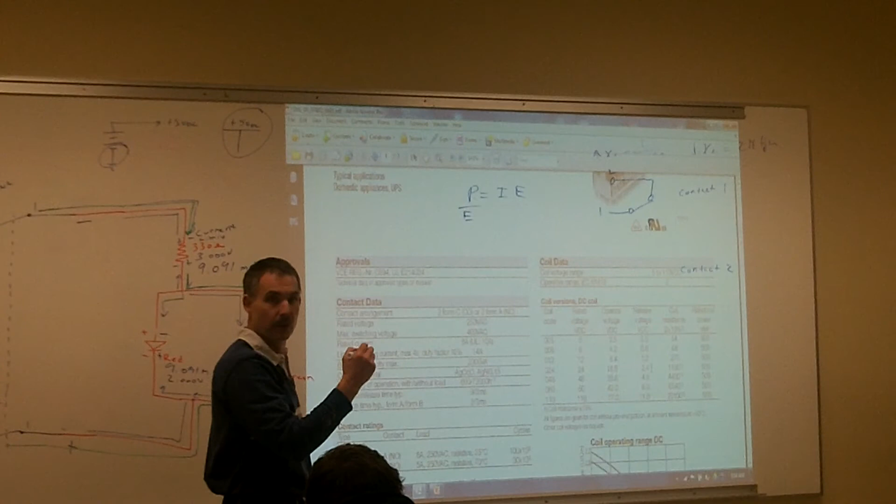So we want to leave our current separated. We just take our P divided by E. So if I take 500 milliwatts and divide it by 5, what do I end up getting for current? It's got to be milliamps. 100 milliamps. You're only off by 1,000.

I knew someone was wrong when they said 10 amps. No coil ever does 10 amps. Well, here's why: we went by the coil's resistance and the coil voltage. It still wouldn't be 10 amps, would it? No, 10 milliamps. Oh yeah, and that sounds low. 100 milliamps, yeah, about 100 milliamps. So I can switch up to 8 amps, but it only takes 100 milliamps of current to turn it on.

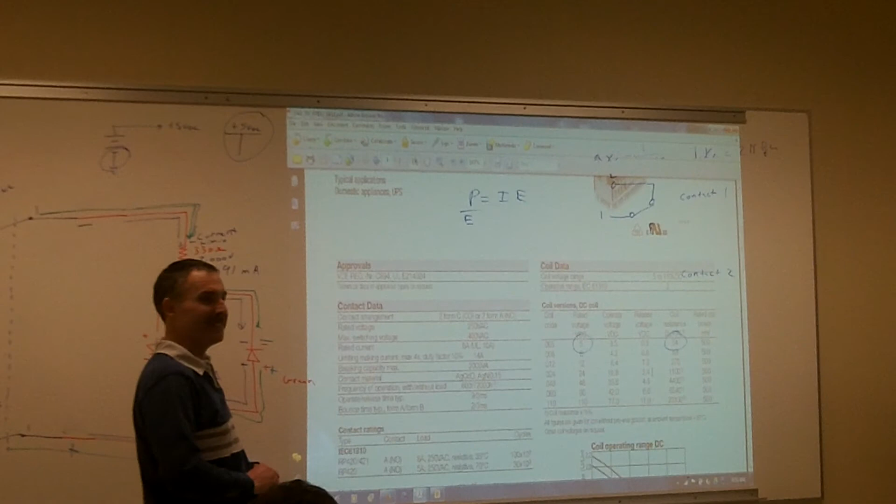Hey Kurt, can I interrupt just for a second? You always interrupt. Only if we can put you on video. Oh yeah, no, that's right. Well, if I get a haircut over winter break, then maybe. I would have got one this weekend, but the lottery didn't come through. Yeah, sit down, I'll take care of you the old-fashioned way.

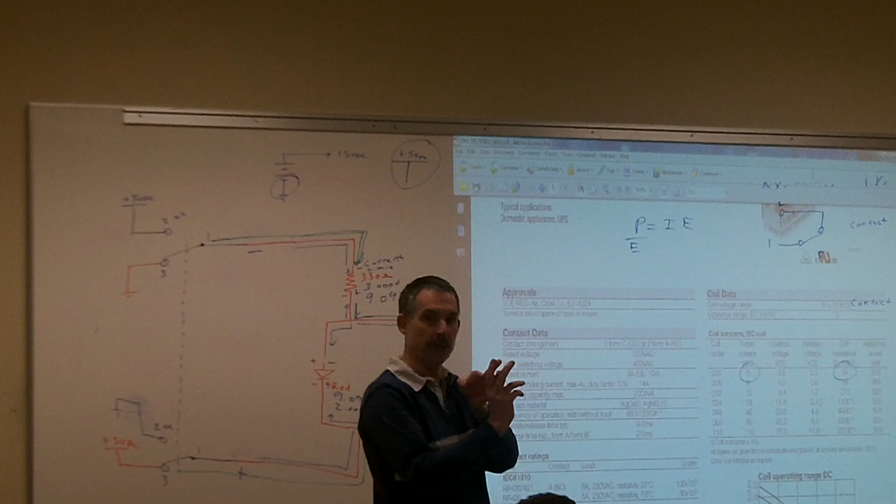So be careful of that. And then remember that 1,700 is our required math for our program to get the degree, and that's the only one that's worth a Gen Ed. Okay? 900, 950, 1,400 — none of those go towards your 18 credits of Gen Ed. Those are developmental classes. 1,400 doesn't give you 5 credit points toward your degree? No. I heard you say that. I want to come back in.